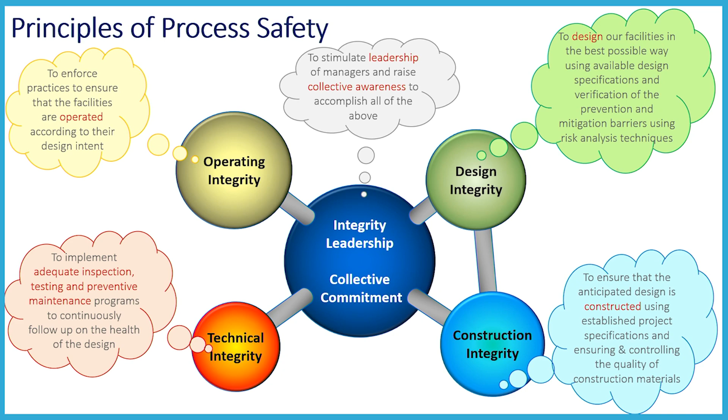Not forgetting, of course, that these principles depend to a large extent on leadership, example, but also on collective commitment of the entire chain. Even with the best leaders, if we do not have a committed workforce, it will be very difficult to deploy these principles. Again, these principles are not very complicated. The complication is on the deployment, like in so many things.

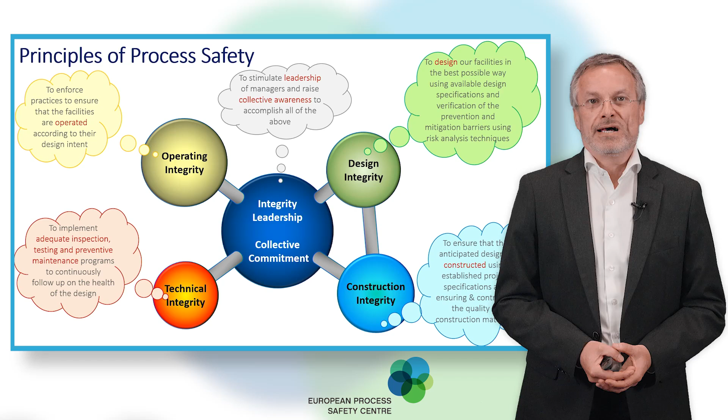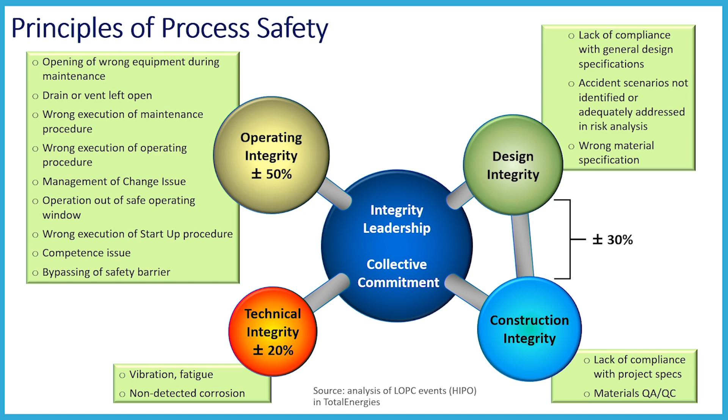I will explain this a bit more in detail on this slide, where I put a couple of numbers to see the relative importance of these principles. We have usually very good designs, but it happens now and then that we see some issues related to designs, not forgetting that a lot of our assets were built decades ago, not according to the most recent specifications. So we see now and then that there are some issues with the design, but this is a minority. We see that from time to time we have issues related to inspection and maintenance of equipment.

The focus of this speech is not that much on design, construction, maintenance, inspection, it is more on how we operate our assets. And that's the operating integrity. And you will see there in the green boxes a couple of examples of the issues we might encounter when we speak about design integrity, construction integrity, but also operating integrity.

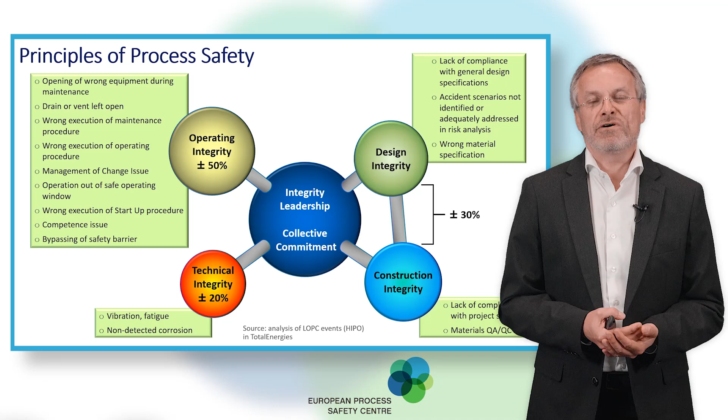So this presentation will focus on the operating part of these principles, because even with the best possible design, even with the best possible construction, and even with the best possible maintenance and inspection programs, if we do not address the operating part, well, we are missing roughly 50% of our loss of containment scenarios. So sooner or later, we have to be involved in addressing the operating part of process safety. And that's the foundation of this presentation.

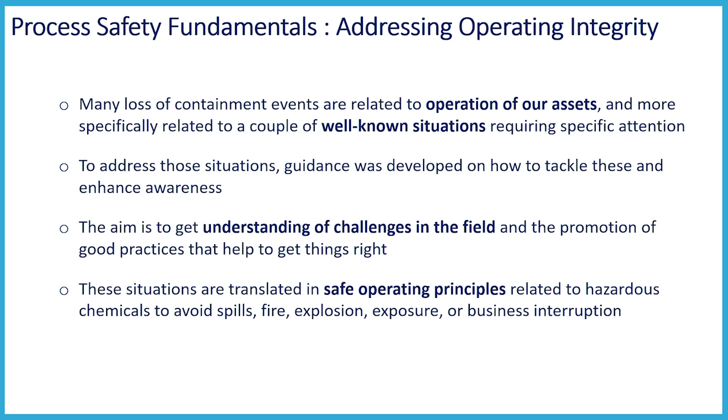So addressing operating integrity. Now, it means that we have to, in a way, make everybody aware of what that means, in very simple wording, to put a focus. When we speak about operating integrity, what does it mean? What are the challenges? What are the issues? And be able to explain that to the workforce in a set of very simple rules.

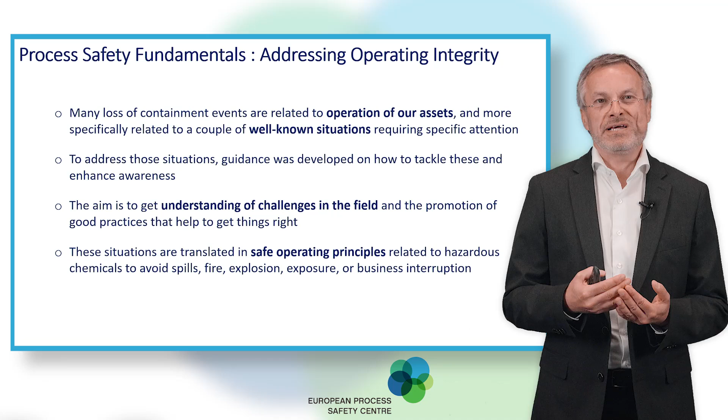And this is why in our industry we are developing what we call process safety fundamentals. So a couple of basic principles that we have to apply if we want to make sure that we do not repeat loss of containment incidents and accidents. Now, the first company that initiated that principle of process safety fundamentals was the company Shell. That's more than 10 years ago, where they tried to visualize about 10 principles using pictograms in an attempt to highlight the operating issues we are facing day to day.

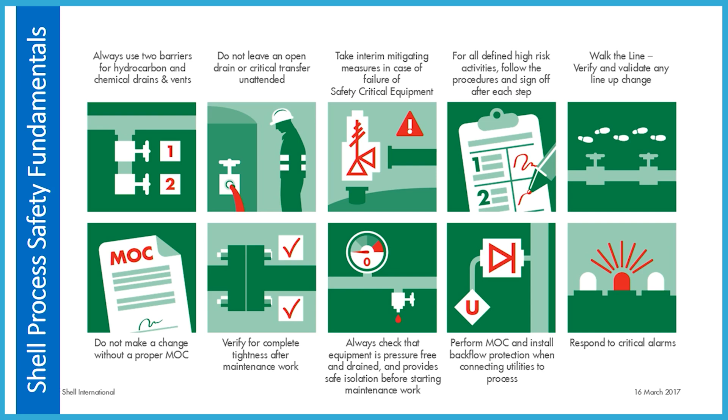Now, since then, a lot of professional organizations have seen the benefit of working this way. Again, it's not about inventing new rules. The principles are known for many decades. It's about presenting it in a novel method, in a very pragmatic, in a very easy to understand way. So since Shell has been introducing those principles, well, other organizations have seen the interest.

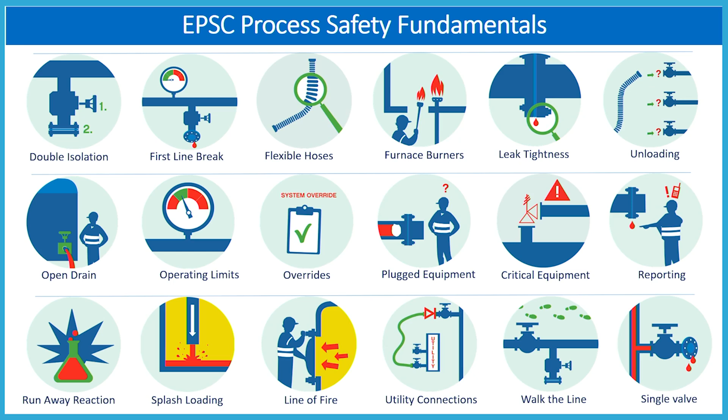Also, EPSC, the European Process Safety Centre, has seen the interest to develop 18 process safety fundamentals, and you could ask why 18 and not 10 like IOGP or Shell? Well, quite simply because EPSC is not only including oil and gas companies, it's a bit larger. You have also the pharmaceutical industry, the agro industry, the metallurgical industry. That means that we need to broaden the concept a bit. But again, the concept is still the same. Let us focus on the operating issues that can pose issues, and let's have a discussion about these.

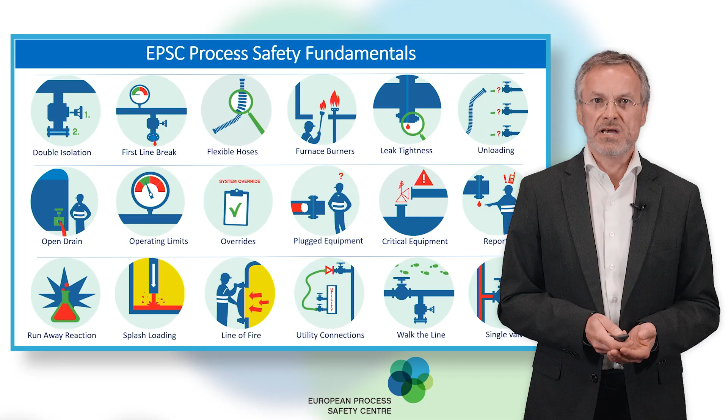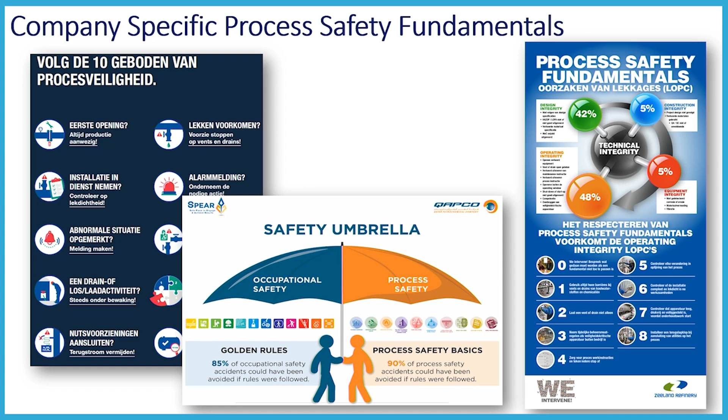We've seen that some companies have started to develop their own set of process safety fundamentals. Here are a couple of examples. Why? Because they feel it's important for them to have fundamentals that are reflecting their issues, not necessarily the ones that were proposed or developed by professional organizations. They said, hold on, for us it's important that we list the fundamentals that are relevant for our business. So you see that some companies say we will develop our own, and again, it's not a surprise that many of them are the same as the process safety fundamentals published by Shell, by EPSC, by IOGP.

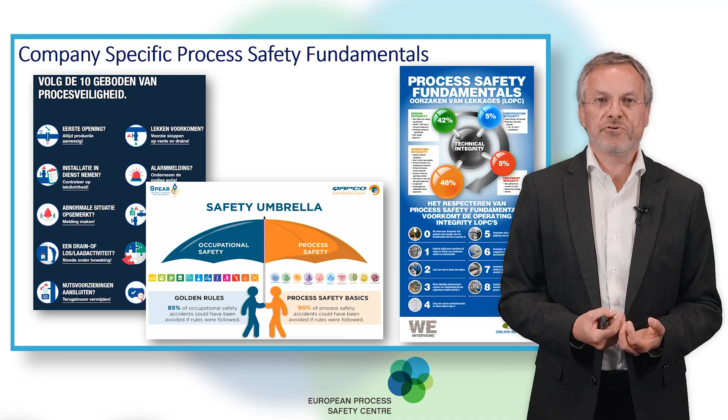So it's not a unique list of fundamentals available on this planet. It's about making sure that we address operating integrity and that we are addressing the right principles, and that may vary from industry to industry. No companies are the same. Even companies in the same sector might be facing different issues, and that is sometimes reflected in the number and especially the type of process safety fundamentals that you can find in their manuals.

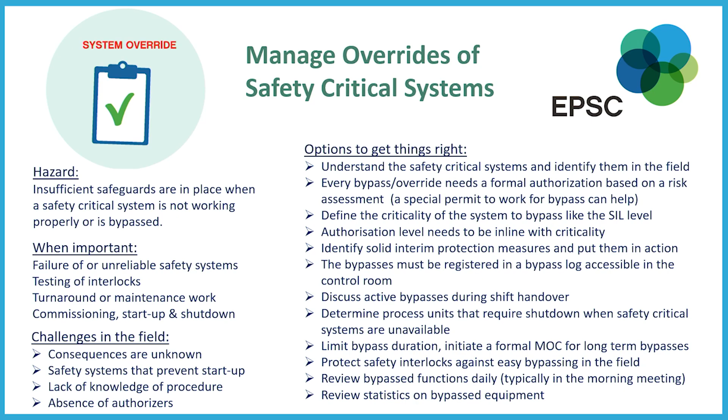Now here is an example of one of the EPSC process safety fundamentals. It's a one-pager, so it's important to keep things simple. It's not about endless pages, difficult to read. The basic principle is it's known issues that we want to highlight and explain in a simple way. Here in EPSC we have a one-pager for each of the 18 process safety fundamentals.

This is an example of one of those fundamentals, which is speaking about how to manage overrides of safety critical systems. On this one-pager, you can find what the issues are, what the hazards are, what the challenges are, and most of all, what we can do in our operations to overcome, to recognize, to manage, to make sure that we do not repeat issues related to bypassing of safety critical systems. Again, one-pager, not very complicated, accessible in simple language to be used by everybody in the organization.

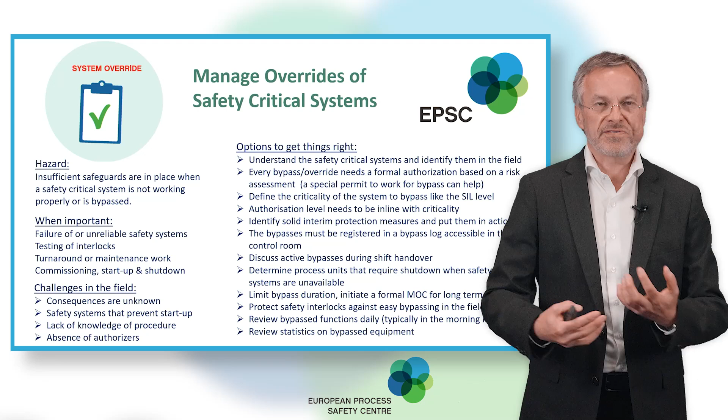So again, the key is not let's invent something new, but let's identify the operating tasks that may pose an issue, and translate that into some guidance that we will explain in a very simple way. So some characteristics: again, it's nothing new. These principles are known for a very long time. It's focused on behaviors, on critical tasks.

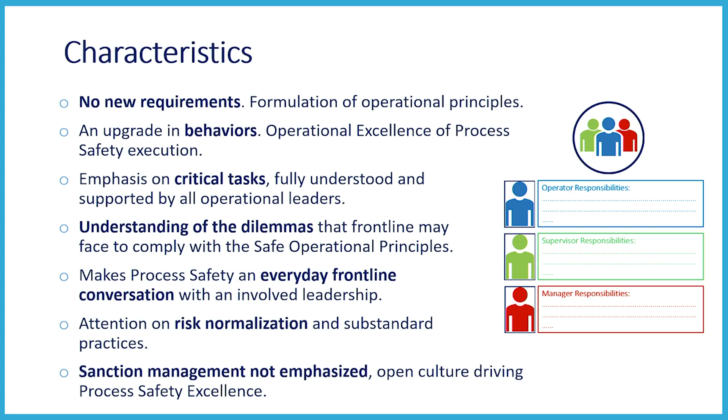Again, it's the operating part of integrity. The design, construction, maintenance, inspection are covered by other programs. Here, with the process safety fundamentals, we will target the operating part of integrity. And it's also to create understanding. Again, the designs we have, especially in Europe, are not the most recent. A lot of our assets were built decades ago.

If we would rebuild a refinery today, it would probably be designed a bit differently, because technology is developing and the requirements are also developing. So it means that we are asking our operators to operate designs from, let's say, 40 years ago. And that may give some challenges, challenges that are not always easy to solve.

The process safety fundamentals are not there to judge; they're there to be aware of the dilemmas that operators can encounter in our assets, and let them think before they continue. If there is a difficult situation, we do not want them to continue, but to discuss with peers, with managers, with frontline supervisors: What am I doing here? Is this the right way to do it? Should I stop and go back and rediscuss? And that's the core, having the discussion.

We see that a lot of incidents are happening because people want to continue operations, and even when confronted with a difficult situation, do it their way, not necessarily aware of all the hazards involved, and then end up in that tunnel where they have an accident because they did not take the time to discuss the issue with colleagues, with frontline managers, to make sure this is the right way to proceed, knowing that the design is not optimal.

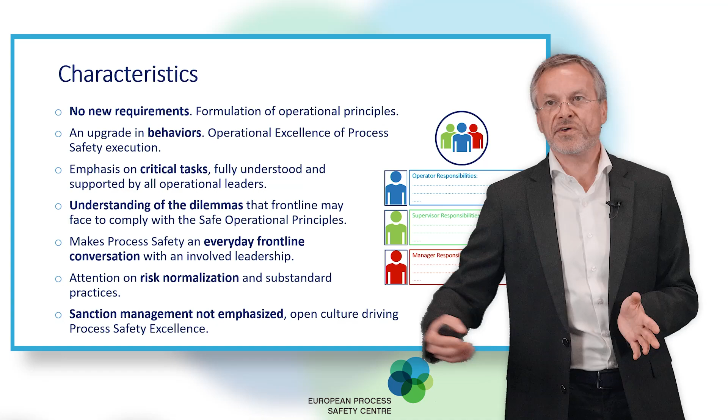Now, we try to visualize that. Again, our minds are visual. It's more like this video, by the way. It's sometimes easier to explain something in a video than to give a book of 200 pages. The messages are the same, but people will remember longer because our minds are visual. We tend to remember what we see, not always that much what we read.

And this is translated into a poster where the process of working with process safety fundamentals is displayed in a cartoon-like way, where you see the responsibilities not only of operators, because you might think, okay, there we go again, it's the fault of the operators. No, it's clearly the whole chain that is involved. It's not a responsibility of the operators alone. It's a collective responsibility. It's people working together, operators with their frontline supervisors, with their managers.

If there is a serious issue with the design, to free the budgets to solve critical issues. Of course, we will never entirely rebuild a refinery that was built 30 years ago. But if there are critical items, there is a discussion: should we maybe change the design, have a double isolation instead of one isolation, and so forth.

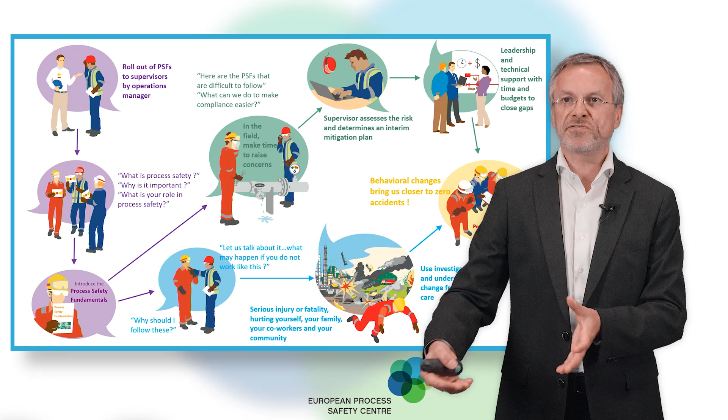So this cartoon-like poster explains the responsibilities not only of the operator, but also the supervisor and the manager. So again, it's teamwork, it's a collective effort. If something happens, it's not one person that is at the core. It's usually the whole chain that has a role to play.

Now, many of you know that we have things like life-saving rules, some call them golden rules, and just to highlight that the process safety fundamentals are also a set of rules, but these are completely different things.

Life-saving rules are addressing everybody in the organization. These are quite simple rules that in principle everybody can and should apply. There is even a kind of a zero tolerance policy if you are not following these basic life-saving rules. Well, you could bear the consequences, because usually there is a sanctioning policy and a zero tolerance policy against infringement of life-saving rules.

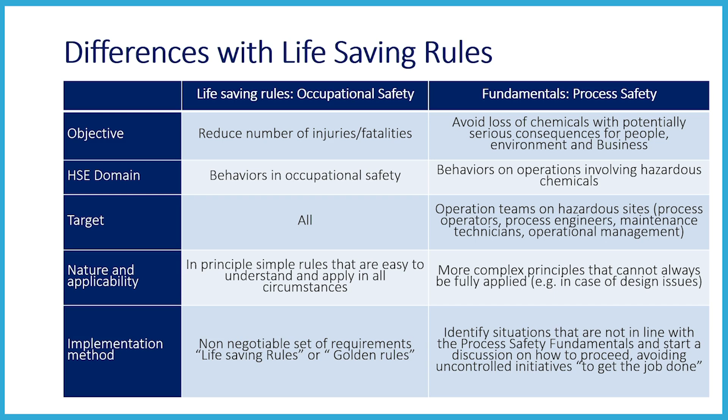Now, in process safety fundamentals, it's not the same context. It's not "if you do not follow this process safety fundamental, you will bear the consequences," because we know that some situations are difficult to solve, are inherent to the design. So there it's not like in the life-saving rules that everybody can follow, should follow, that you will bear the consequences. There it's an attempt to bring the discussion at higher levels. We know that operators will be confronted with issues that process safety fundamentals tries to resolve. So there it's not at all a matter of sanctioning, it's a matter of let's discuss before we continue.

If we have to isolate an equipment and we have only one valve, and we know that valves sometimes are leaking, well, can I continue? If not, what are the compensating measures? And this is something that you cannot solve on your own. It needs a discussion between operators, with frontline managers, with higher level managers. So the context is completely different.

These are, well, not even rules, these are principles to be used by operators, and these principles are so important that whenever they are encountered, well, let's have the discussion. It's not a problem of blaming or not blaming. It's there to avoid that people, while wanting to do good, are entering a tunnel where they find a solution that may result in an accident or an incident. So it's in a way stopping this propagation by having a discussion on how to proceed. And so the context is quite different, not to be confused with life-saving rules.

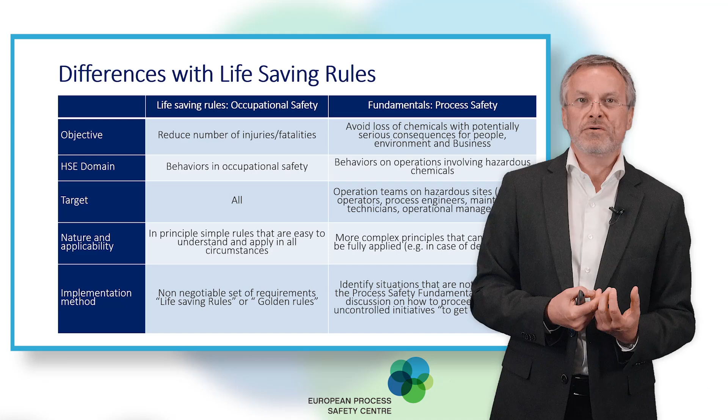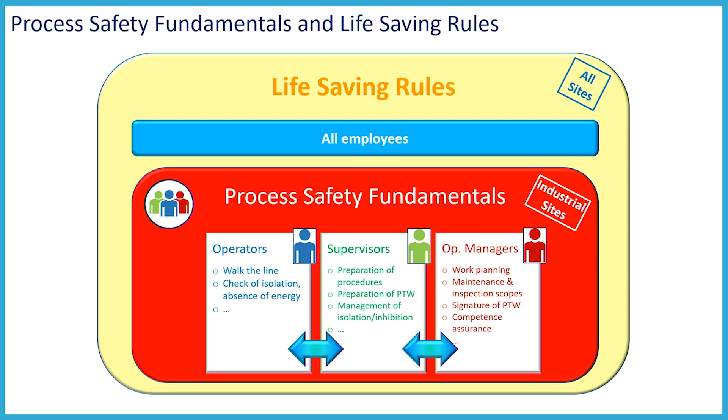Now, I try to visualize this on this slide. So life-saving rules are to be applied by everybody in the company. There is in principle no reason not to follow them. So everybody, regardless of the function, should follow them. Process safety fundamentals, it's a bit more narrow. This is not targeting everybody in the organization. It's targeting people that are in the field working with valves and equipment, or people that are in operations.

And also, it's not a rule set like the life-saving rules where you must follow them. There, the idea behind it is whenever we encounter an issue, as explained in the process safety fundamentals, well, let us not continue. Let's take a step back, pause the work. Let's have a discussion and only proceed whenever everybody agrees that this is the right way to proceed. And again, you will see on this slide, it's not about the operator. It's a collective responsibility. It's the operator together with the frontline supervisor, together with the managers. So everybody there must play a role to avoid that difficult situations end up in an incident and an accident.

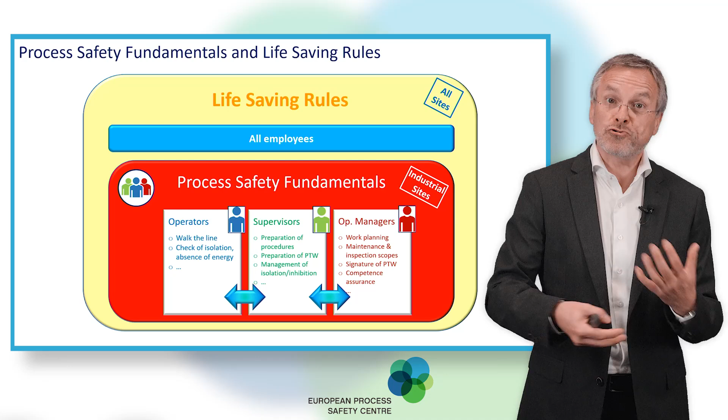And it's important because with the 10 or 12 or 15 process safety fundamentals, we know that when we are successful in implementing these, we will avoid more than 50% of the incidents related to operations in our facility. So to kickstart it, of course, attacking 10 fundamentals at the same time may be a bit difficult. Usually what we do is we pick one of the fundamentals and start the work from that principle. Not doing everything at the same time, that may be a bit of a challenge.

So to start easy, pick one process safety fundamental, communicate it, make sure that people are aware of it, follow up what are the difficulties in the field, is it working, is it not working, and whenever you find that there is agreement in the organization that it's working, then afterwards you step up a bit. So it's a gradual implementation. I do not know a lot of companies that deployed everything at the same time, so you have to make sure that it's accepted by everybody. So it's not an exercise of here are the process fundamentals, good luck with it. No, it needs a bit of deployment, of coaching also.

It may need some time to be successful, but we are all convinced that if we are successful in making sure that these fundamentals are deployed and everybody is aware, it will result in a lower number of incidents, accidents, and a lower number of people being injured, and that's of course the core of the exercise.